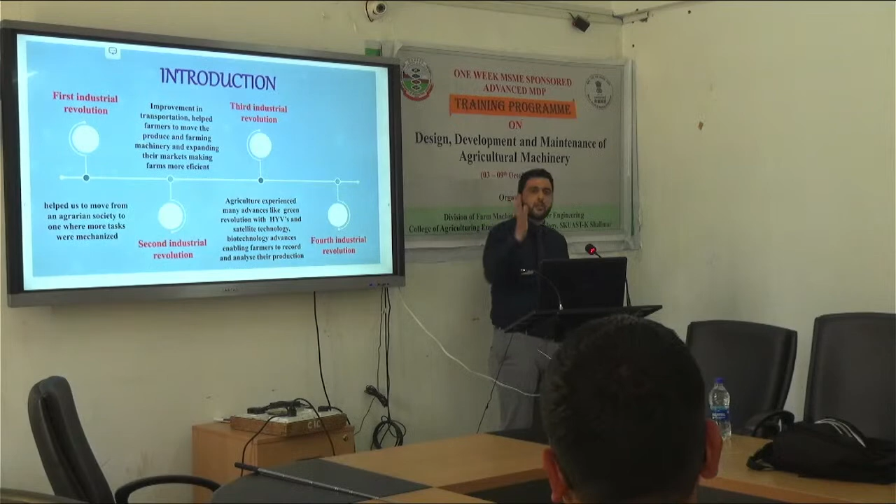Then, in the third industrial revolution, what was happening parallel in agriculture? Green revolution, high yielding varieties, mechanization, nutrients - all of this was happening in the third revolution.

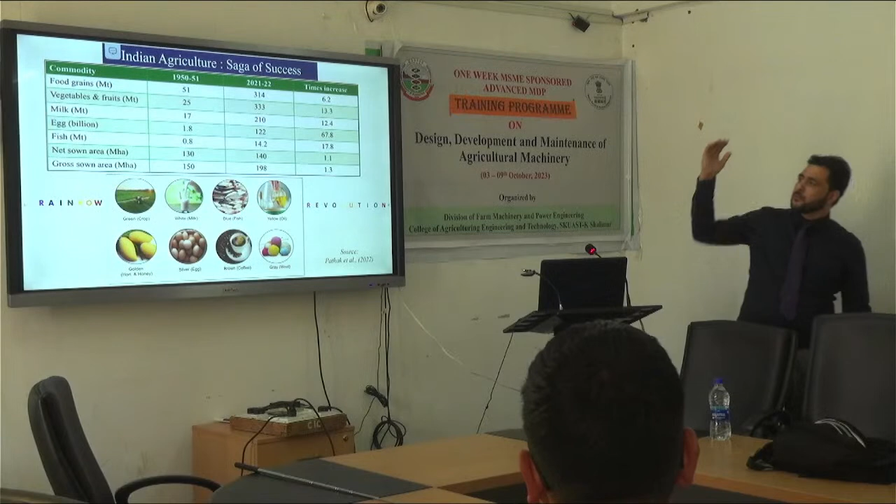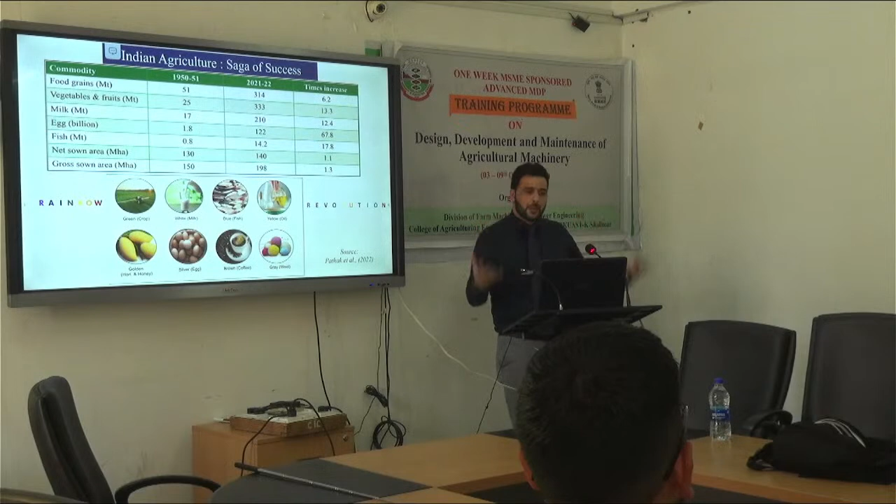What is happening in net sown area? Just 1.1 times increase. What is happening in gross sown area? 1.3 times increase. This means we have been able to sustain the growth in agriculture through increase in productivity, per unit how much you are getting, that we have been able to increase. Now India is thinking to be developed by 2047.

So currently you have extra food, you are food sufficient, but what will happen in 2047? The population will increase. The target is to reduce the population below poverty line, BPL. Although this is not the right term, BPL, it is actually bottom of the pyramid, not below poverty.

Rural population dynamics will change, people will be migrating to cities, so urban areas will have more population. There will be a drastic reduction in agricultural force. This is one point, keep in mind. I will remind you continuously - drastic reduction in agricultural force.

We have to increase the income to be developed, it should be parallel to the US. But if you see the bottom two again here, the resources - your water and your land availability - they are going to reduce drastically.

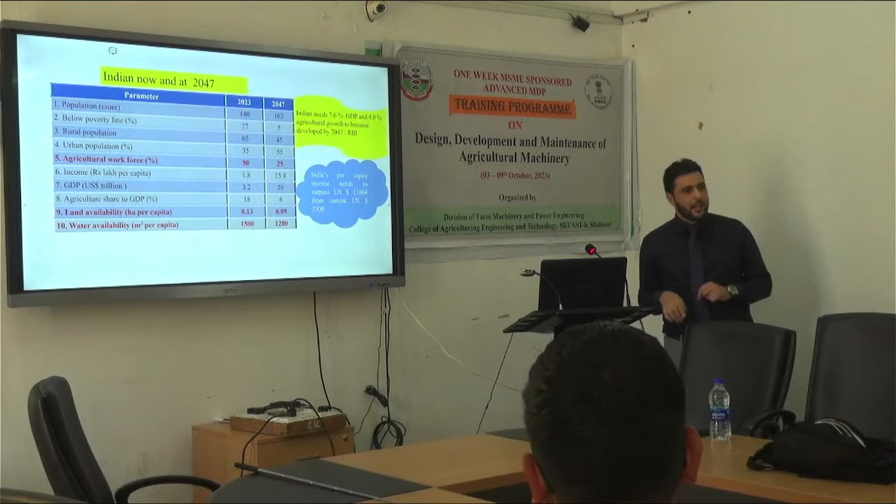So how does agriculture have to progress to sustain the current condition in 2047? We should be food sufficient, food secure, and we should be exporting food. So based upon this population, the National Institute of Agricultural Economics says you need this much food, this much fruit, this much vegetables and nutrients.

And there is a target to increase mechanization by how much percent? It has to reach 75%. For farm machinery people, this question is sometimes asked in JRF, SRF exams - what is the level of mechanization in agriculture in India? It's currently 45-47%. Government has set an ambitious target to increase it to 75%.

To reduce post-harvest losses to 10%, it's currently 15%. Water use efficiency is currently 40%, it has to go to 60%.

Now see, these are the challenges I'm telling you - to increase mechanization, to increase water use efficiency, to increase nutrient use efficiency. Nitrogen use efficiency is currently 35%, where does it need to go? It has to go to 50%. And agriculture export accordingly. If we are able to do these bold-letter items, then others can be done.

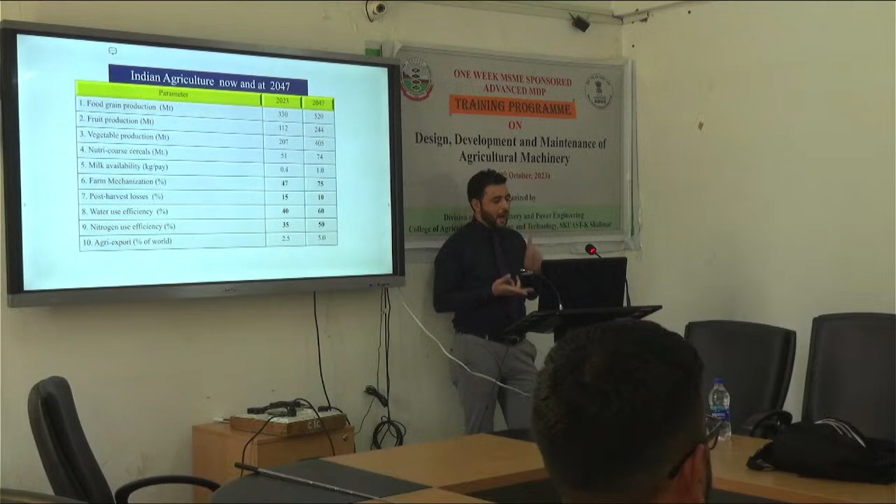So if you see this, one is farm mechanization. Other is to reduce post-harvest losses. How can you reduce post-harvest losses? By having proper storage structures, on-farm storage, cold storage - everything should be there. Then you have water use efficiency.

How are you going to achieve water use efficiency? You are going to use advanced irrigation - drip irrigation, sprinkler irrigation. That way you are going to save water, using advanced methods.

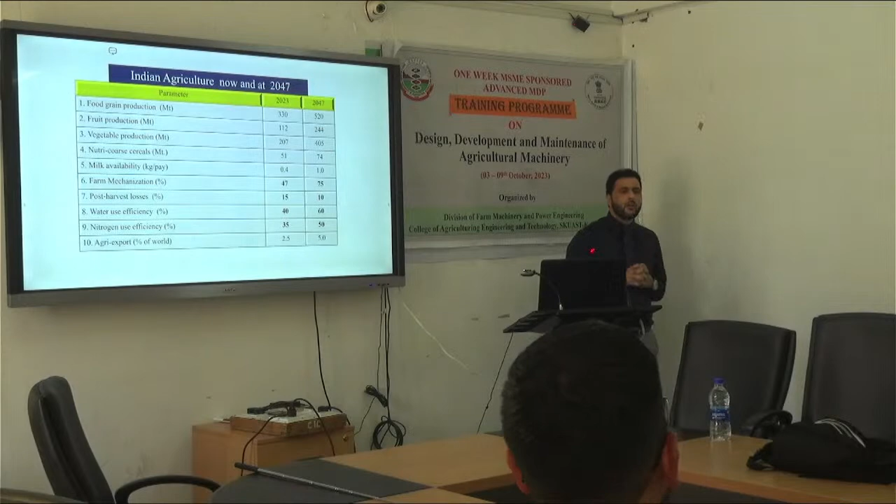Then next is nitrogen use efficiency. How are you going to increase nitrogen use efficiency? You are going to use better fertilizers, coated fertilizers like neem coated urea. You are going to use variable rate technology, variable rate fertilizer applicators. That way you are going to fix it. So this is the target.

So what you can get from this is that these are all engineering aspects. It's all about engineering - that is why the future of agriculture is engineering agriculture. Engineers of the 21st century must know biology, and biologists of the 21st century must know engineering. So whether you are from horticulture or engineering, you have to know each other's discipline. Agriculture engineers cannot contribute if they don't know biology and agriculture. Same way, horticulture people cannot progress if they don't adopt engineering. It's intermingled, it's like that.

That's the future. So when the future is agriculture engineering, or we can say engineering agriculture, this is what you have learned till now - the green revolution helped India attain self-sufficiency. That's the number one point which you learn.

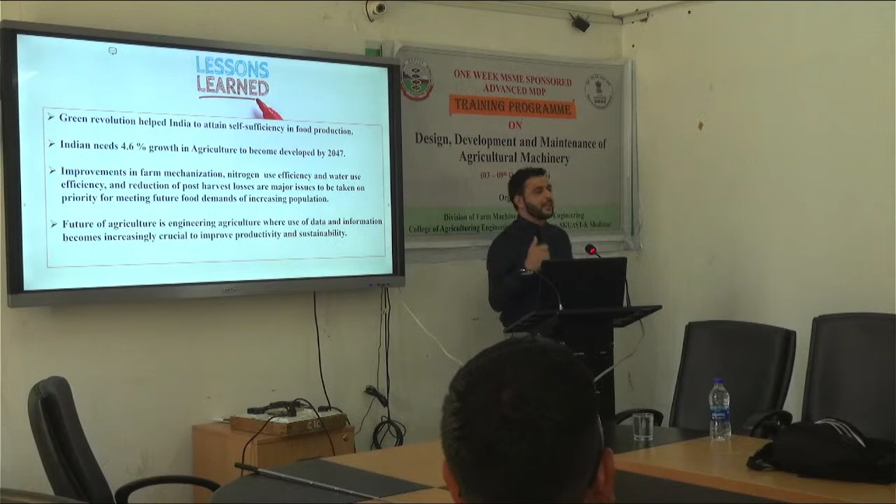India needs 4.6% growth in agriculture to become developed by 2047. The third point is improvement in farm mechanization, nitrogen use efficiency, and water use efficiency - these are required to meet future demands. The last point is that the future of agriculture is engineering agriculture, and when that's the case, we should know engineering design.

I am going to take you back to the point I started with, why I need to be present in this lecture. So when we go for the engineering design process, what is the first step? What is the first point? How do we start engineering? What is the need? What is our need?

Let us suppose, every research project starts from need. If there is no need, then why waste the time?

For example, you have the crop apple. What is the current engineering need in apple cultivation? Tell me. Cold storage, spray - many needs may be there. So we will first analyze the need. What is the need? What is happening? What is required? So that is the first step - define the need. In any process, first define the need.

What will come next? Tell me. Use your brain - this is just interaction, not a knowledge check. We have come here to learn. You learn from me, I will learn from you. This is how the capacity building program goes on.

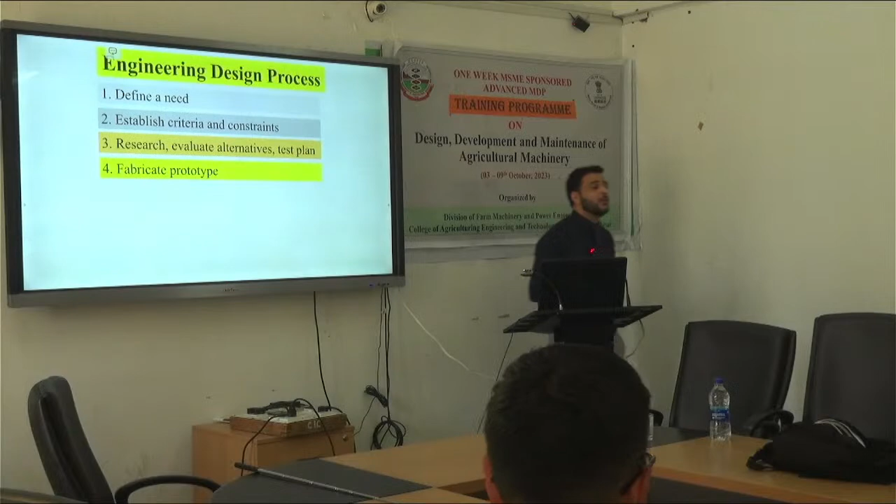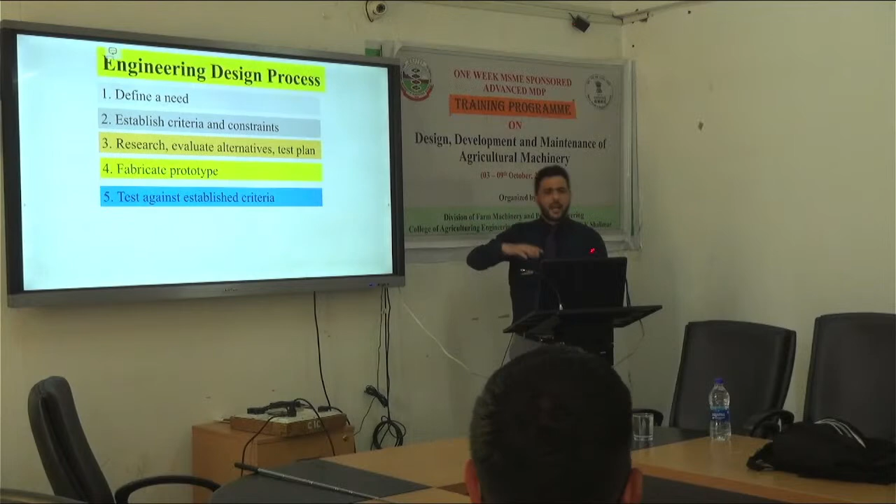There you get stuck - how to fabricate, what materials to use, what I have to do - all these questions arise. So once you fabricate, you test it based on the constraints you have set, like that it should cover this much area in this much time. You test it accordingly and try to refine it.

Then you do its failure analysis. You had set some constraints, like that you would build it tractor power operated, but the power range should be up to 35 horsepower. But once you made it, it isn't even being operated by 40 horsepower.

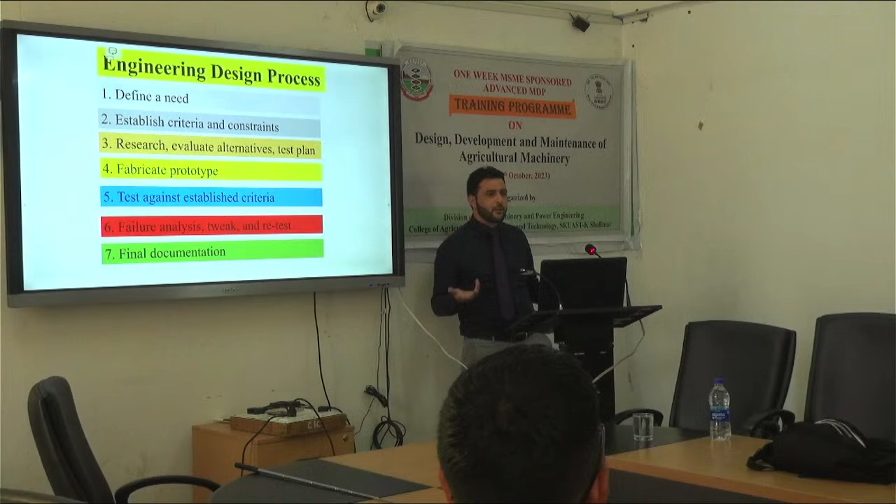So you try to analyze where the problem is, which you want to rectify. You do the failure analysis, and finally you do your documentation. Okay, I have developed this technology. So this whole thing is about engineering design process, starting from solving the problem of agriculture, where the future is engineering. When you are going into engineering, ultimately you have to fabricate, and that is why you need to know the modern practices for fabrication.

You got the point? Yes. So the point is clear, that when we go for the modern trends in farm machinery, the first point is sustainable material. First the material comes - which material you will use. Second will come how you are going to design - you may use design software. I will discuss these points.

If any time you feel bored, you have the right to go out of the class. It's not that I will keep you bound, okay. This is the interaction - if somebody is feeling bored, they can go roam around and come back. Okay, this is it, and you can stop me anytime. If you have any confusion, you can stop me. This is considered capacity building. Okay, that's important - it's not lecture, it's not training.

Okay, what is the difference between capacity building and training? Actually, for humans, the term is capacity building - so that you build their capacity, they can apply that anywhere, here and there, not in one direction only. Who normally trains? Circus people - they train them that you have to do it like this, this way, nothing right or left. But we try to have the capacity building for you, so that when you go in the actual situation, you use your brain, you use your capacity building, what you have developed, and try to solve the problem.

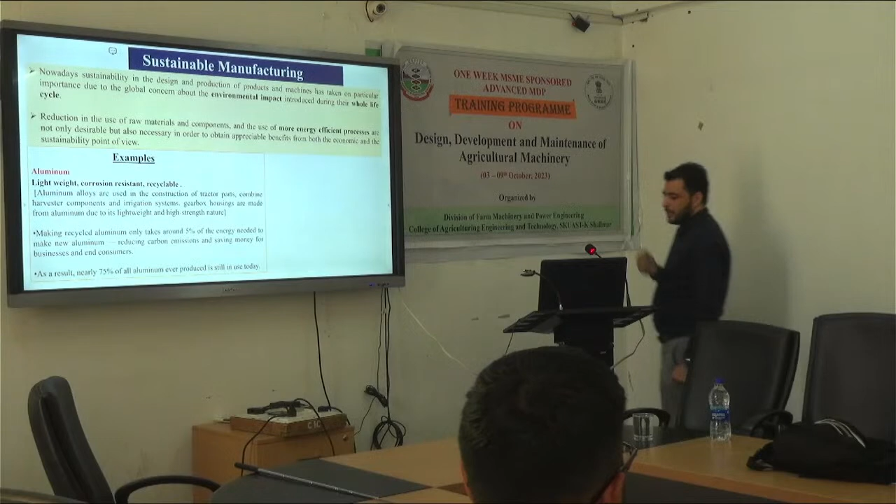So when we talk of sustainability regarding materials, that's why these days sustainability is a big concept. Whenever there is sustainability, understand that it is related to environment. Earlier we were thinking only of economics - we need money, everyone just wants money. Today it is not so. You are earning an additional 100 rupees here, but in the process you are damaging the environment by 200 rupees worth - so that is not a good option.

That's not a viable option, that is why sustainability matters, and one of the materials under focus for sustainability is aluminium. Okay, why? I have written the reason - the reason is it is recycled. Whatever aluminium you are using, it's being recycled, because it doesn't rust, it doesn't get damaged. That's why whatever aluminium you see in the world right now, 75% of it is what was already produced - only 25% is new that comes and goes.

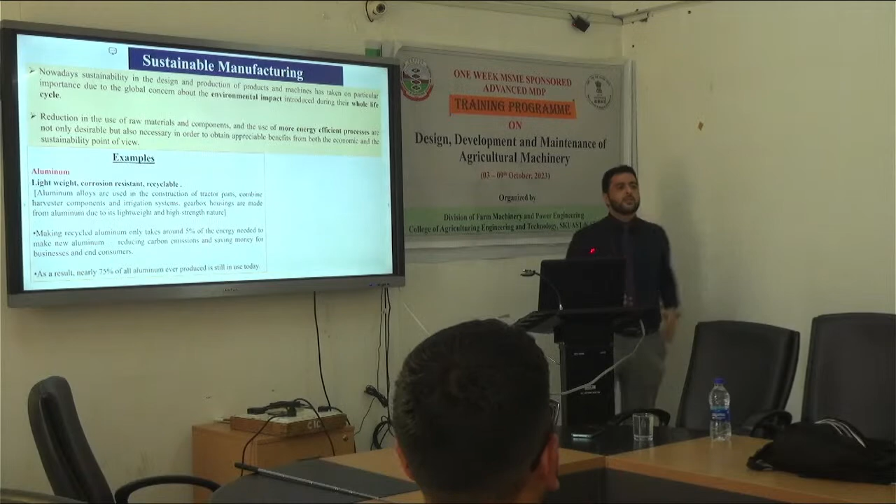Okay, because it is recyclable, it is lightweight. That is why, if you see the future trend in tractors, the roof will be built lightweight - it will be heading towards aluminium. That's what is written here. If it is not visible to you, I am sorry - that is what is written here, that the agricultural tractor is going to be compact, lightweight. So it is to be, for example, with electric tractors.

So you will be using a material that is lightweight like aluminum. It is a sustainable material in the sense that it can be recycled. It is sustainable in the sense that throughout its life cycle, during recycling, only 5% of the energy is used compared to what is used in making it new. So why should we not go for it?

Second point is bioplastics. Bioplastics - you see the plastics you have that are non-renewable. Bioplastics means any plastic that has more than 20% renewable portion. You make it only from agriculture - whether you have sugarcane or corn, you develop bioplastics from agriculture produce. So that is how you add value - when we say bioplastics, it means more than 20% is the renewable component in that.

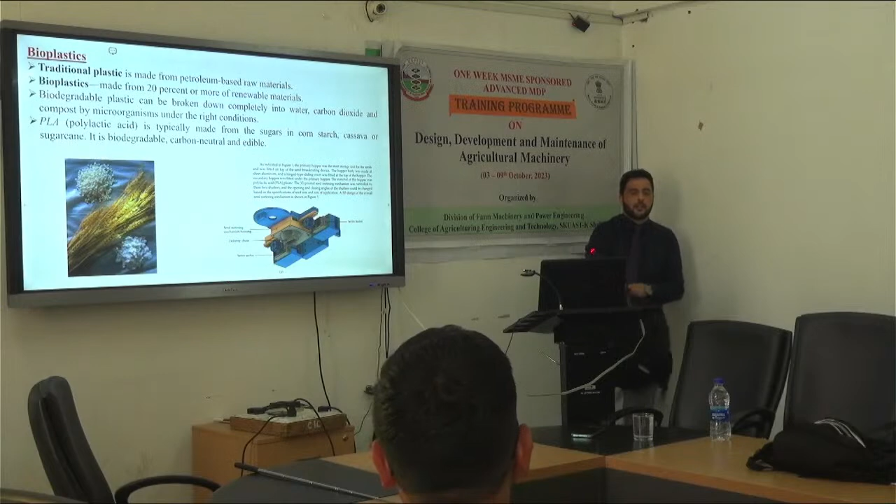And you will see in machinery, many components are made of bioplastics. Like one of the bioplastics is PLA, that is polylactic acid. I think I had a component here with me, let me check.

Yes, you can check this component. This is our bioplastics, this is our PLA. Understand this, I will explain later on how we produce it. This is bioplastics - see, lightweight, sturdy. This is being produced in our lab.

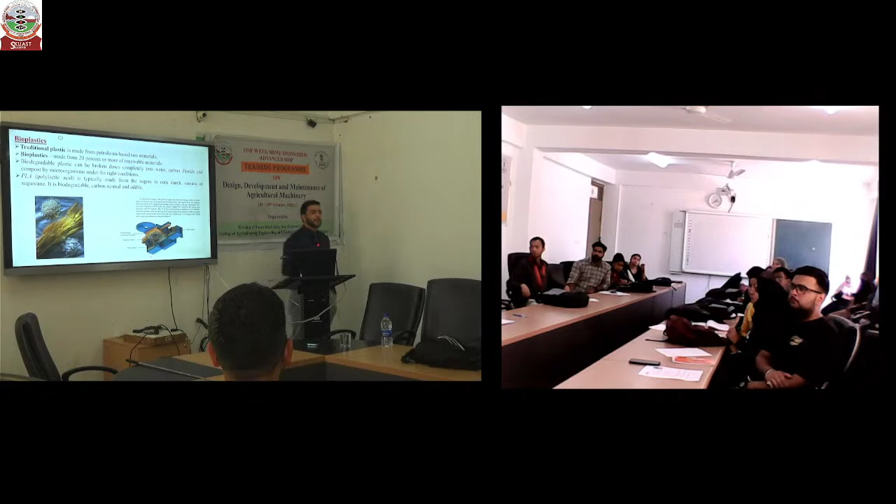So first material is aluminum, second is bioplastics. Any other material that comes to your mind? Something sustainable, environmentally friendly that we should use? Anything comes to mind? Biofuel - yes, but no, I am talking about material, not fuel. Biofuel is not a material, you may use it as fuel in the engine, in tractor engine, but I am talking about material.

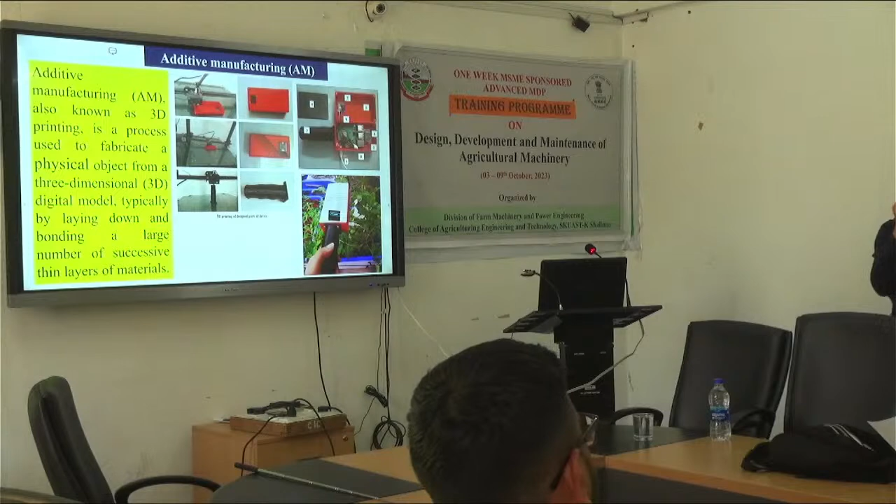ओके, तो सेम वे इसके लिए हाउसिंग बनाने के लिए, ये जो आउटर कवर बनाने के लिए, फिट बिठाने के लिए, we did it of our own, print किया, फिक्स किया, हैंड डिवाइस बनाया। You can see the steps, उसका हैंडल बनाया, सब किया।

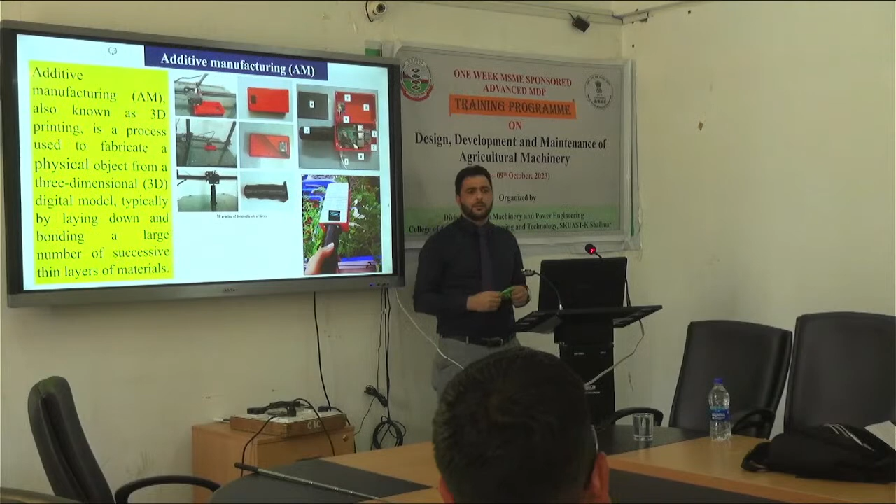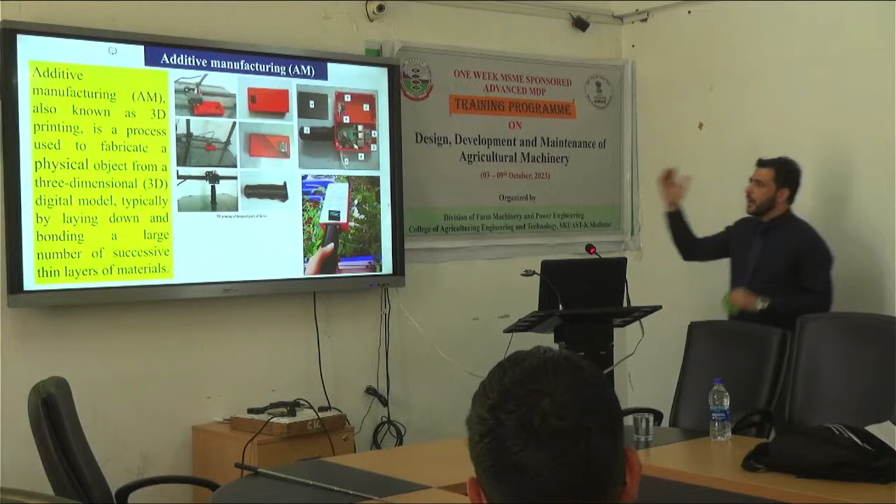अगर आप यही वर्कशॉप में बनाओगे, इसके लिए जो यहाँ प्रिसीजन है, जो सीड के लिए है, ये पॉसिबल नहीं है। So we used the additive manufacturing, that is use of a 3D printer। 3D printer क्या करता है, जो मैंने आपको बताया था, PLA पॉलीलैक्टिक एसिड, ये जो वायर है, you can see this is 3D printer।

आप जो नीचे देख रहे हो ना ये वायर, this is PLA वायर, जो मैं बायोप्लास्टिक्स की बात कर रहा, let us suppose I have to make this। So what will happen, it will create its base on the platform। यहाँ पे घूम के इसका बेस बनाएगा। जब बेस बनाएगा, अब ऊपर ऊपर उसी हाइट में चलता जाएगा।

So you can get this. You can get many 3D printers ranging from 25,000 to crores, you can get depending upon you.

So the next part, first is the material we use. Second part is design, use of design software as CATIA, ProE. Learn at least one design software, it's your choice. Many are there, CATIA is there, SolidWorks is there, ProE is there. You can learn, and I am conveying this not to engineers, to all. I told you to be relevant in future, you have to learn, otherwise you will not be relevant in the future.

Okay, next is automated manufacturing. So in automated manufacturing, what we are doing is automatic welding, many automated operations.

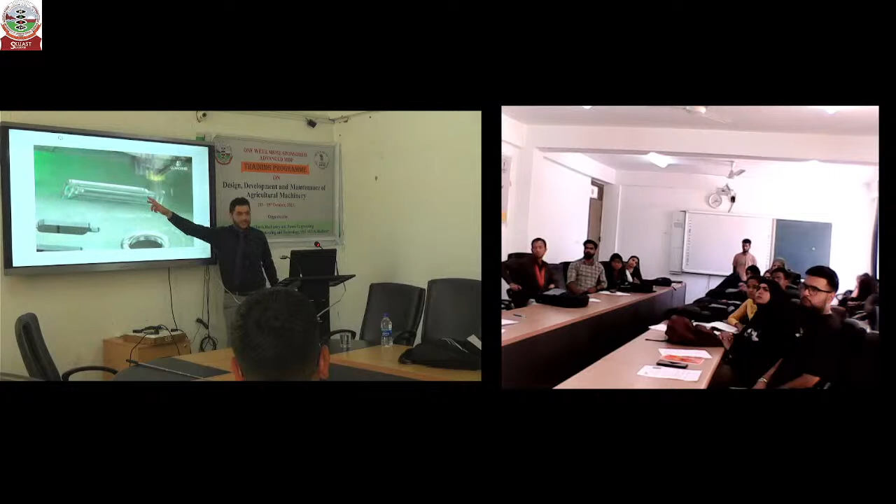Such precise decisions. Through numeric control, it is taking this decision of where to go from here to there, how much to do, that's exactly what numeric control decides, where to go. That's what decision it is taking. What size to make, this is how precisely it is being done.

Okay, I think you understand the best. Later on you can see if you want to see, because I had been given time only up to 11:45, and I had prepared material for the whole day.

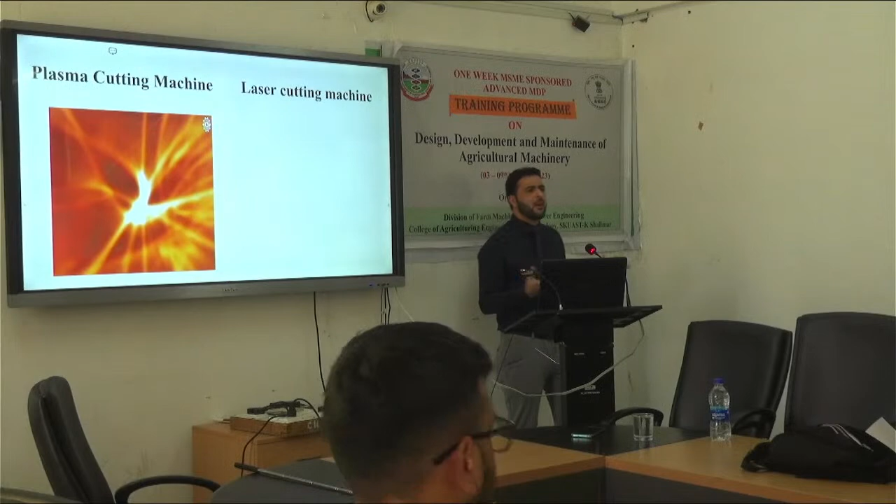You have to do cutting. Two types of cutting are mostly used in advanced manufacturing. One is plasma cutting, other is laser cutting. In plasma cutting, what happens is you generate a plasma beam and cut with it. In laser cutting, you use laser beam. You use laser beam and go for the cutting.

This is plasma cutting, generating that plasma and cutting it. But it's only for cutting purpose, you cannot do other operations, only cut. What shape do you need to cut in?

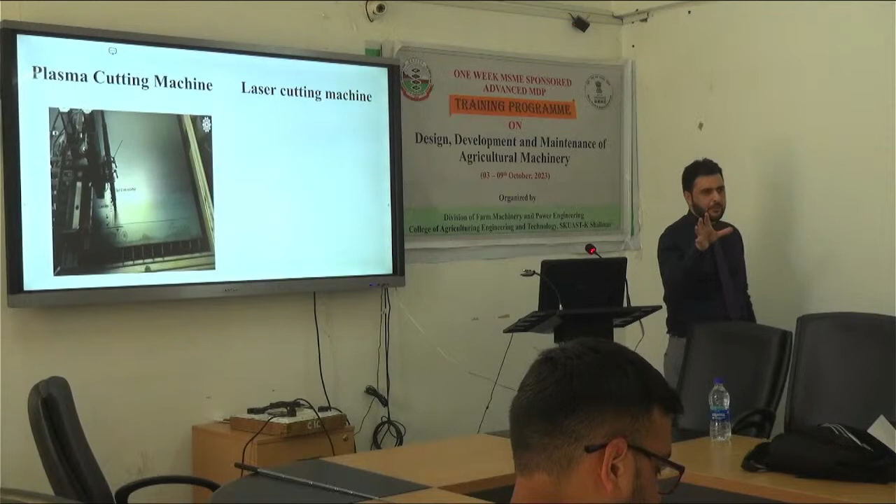Let us suppose you need a covering for a tractor frame. You need to cut that. You can cut hundreds of pieces in sheet metal and take it. You can have the code for this. And the other is laser cutting, same like this, only thing is the beam used is laser beam.

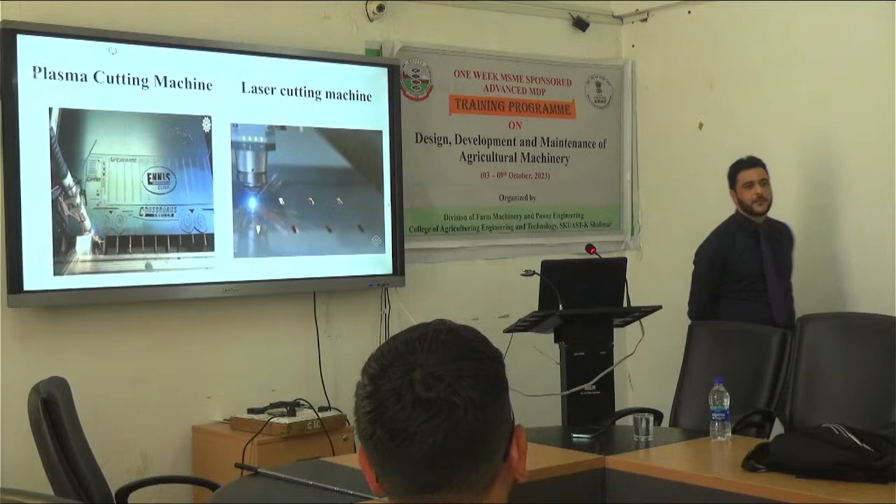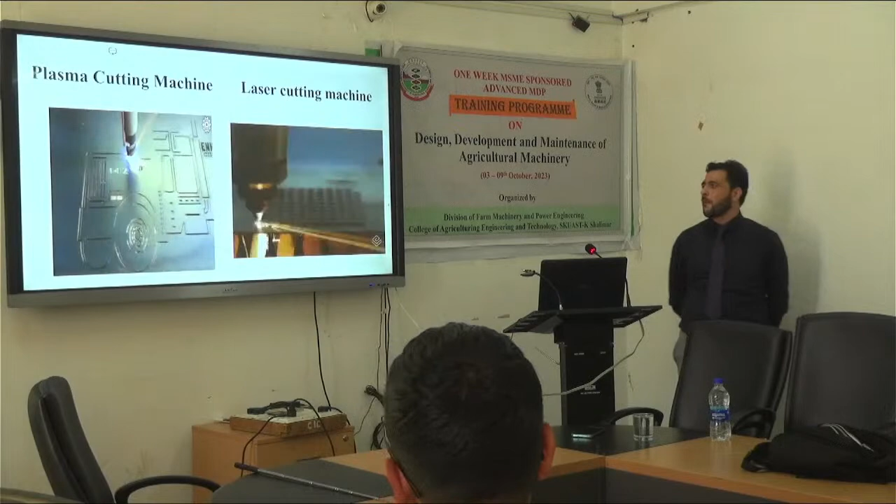You can do many operations like this.

Are you getting the point what I want to convey? It's important that you should know what is available. Only then will you be able to pick. Otherwise you will not be able to. You'll keep working in the workshop.

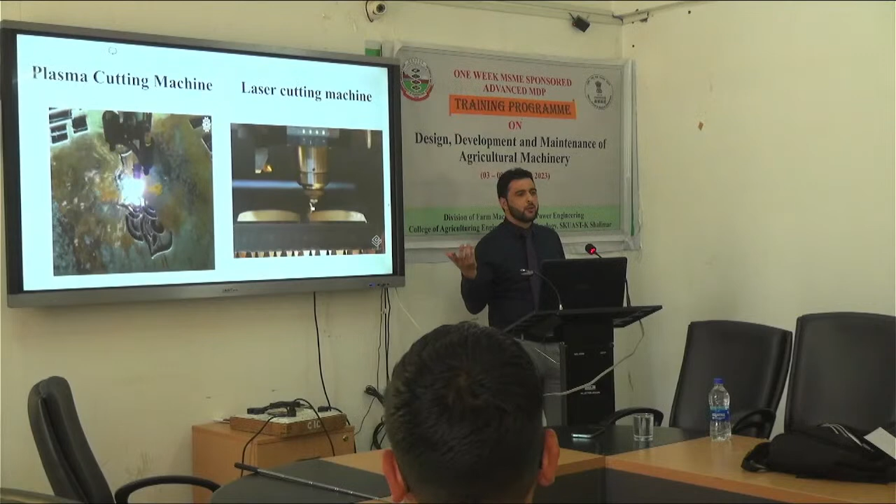You know you have the M.Tech research project or MSc research project for 1 year. You do the course for 1 year, and if you start doing it, maybe it won't finish in 8 months. You go to industry, give 10,000 rupees, say I need this, in 1 day they will give it to you. That's all, you are saving time. This is what I wanted to convey about the advances in manufacturing.

So what is the lesson learned in this part? I gave you 2 parts till now. Can anybody repeat the lesson learned in the first part? Tell me, I had told something earlier related to agriculture.

You need the growth, mechanization is there. These are the challenges to become developed by 2047. You need 4.6% growth in agriculture, along with nitrogen use efficiency, water use efficiency, and mechanization. How do we have to increase these?

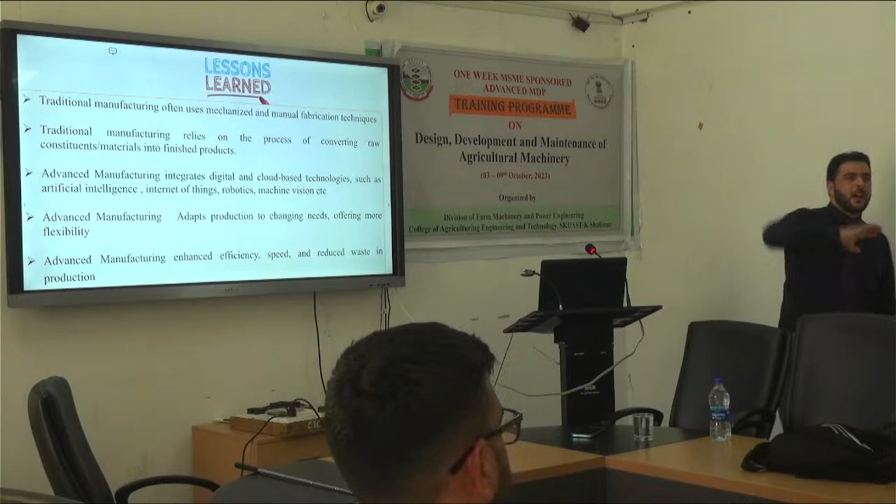That was the first part, and I gave you the idea. Since the future will be engineering, you need to know engineering. In engineering, we follow the design process, and in the design process, fabrication is very important. If you are not able to fabricate anything, you will not be able to call yourself an engineer, or you are not providing any engineering solution.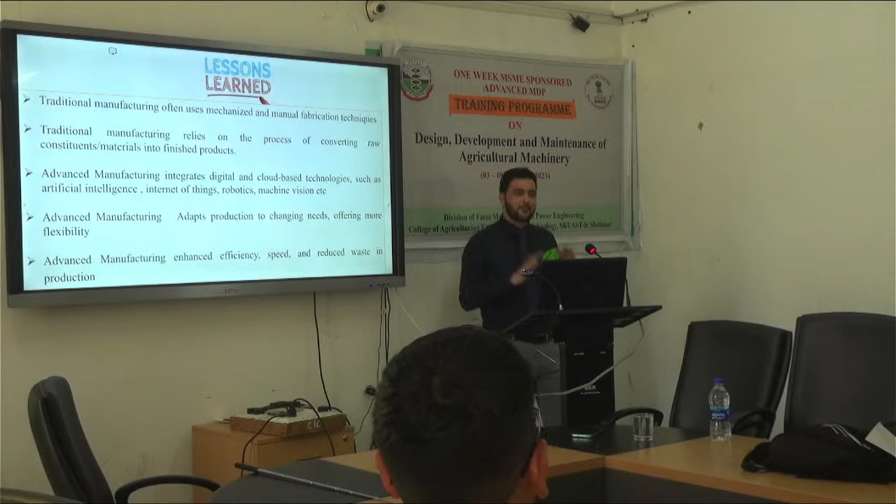This is what is available with you, and you should be knowing this too. Agriculture engineers who are B.Tech or M.Tech might have done all this - arc welding, TIG welding, blacksmithy, fitting, bending, drilling operation. These are the general operations.

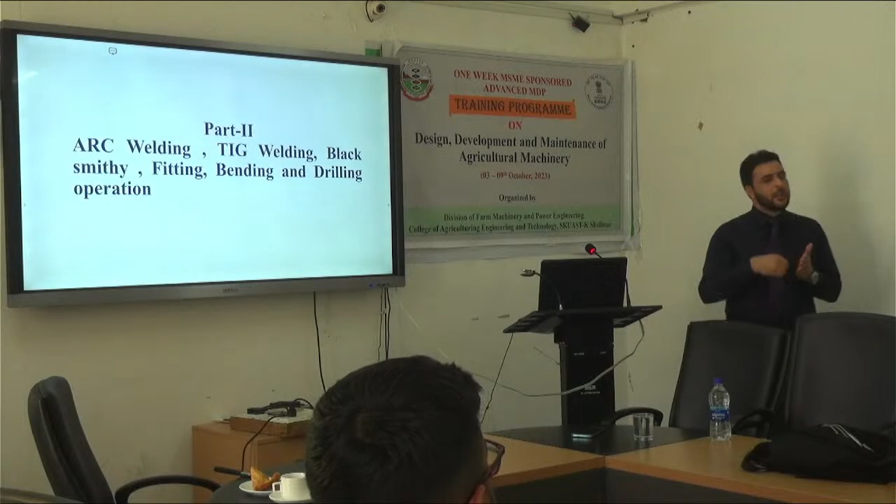So the first point is, whenever you go for the welding, it is not necessary to touch. That is the problem - when we go for the welding, हम सीधे उधर ही टच कर देते हैं. यही करते हैं ना? हमको गैप थोड़ी सी देनी है. We have to allow the arc to jump. जब हमने वही नहीं दिया, हीट उतनी प्रोड्यूस नहीं हो रही, वो मेल्ट ही नहीं हो रहा है, और वो चिपक रहा है. That's what is happening actually.

So the basic principle is, you are going to join the two metals in this. You are going to melt them. You need heat generation, and for heat generation you want the electric arc to jump. For that jump, you need electrodes, क्योंकि करंट को फ्लो करना है, so you need positive electrode, negative electrode.

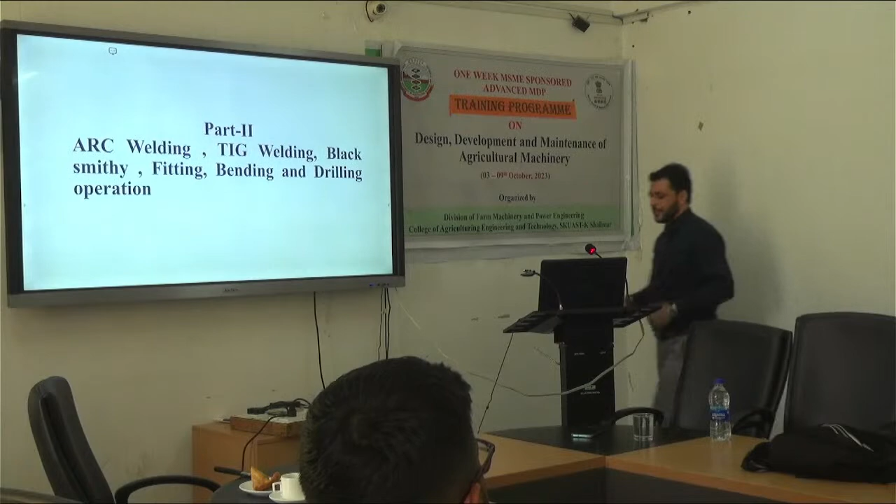इसीलिए क्या कर देते हैं आप? I am going to show you. I hope that this is the basic principle - you need the electric arc formation.

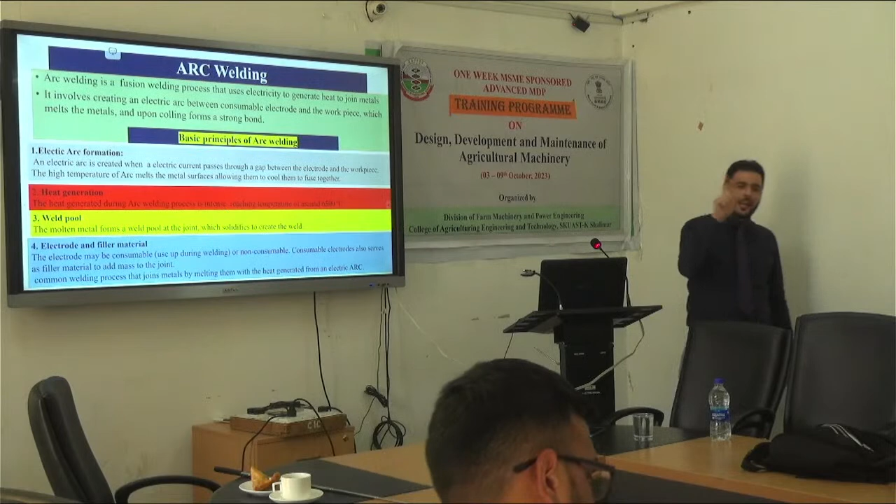Electrode means हमने जो job है हमारा - let's suppose I want to do welding, this is the iron piece. मैं इसको negative connection दूंगा. Now I need to give positive connection, only then current will flow. इसीलिए मैं इसको clamp एक लगा देता हूँ, that is negative. उसके बाद में electrode through positive देता हूँ. Remember, that is the electrode that is providing the positive side.

That can be consumable, that can be non-consumable. Its first purpose is to make the flow of electricity, current through it, so that may be consumable, that may not be consumable. Then we use some filler material. That is why when this electrode is consumable, it acts as filler material. जिन दो को आपने join किया ना, उसमें और एक चीज मिला दिया ताकि अगर कहीं gap हो, वो बंद हो जाए. But there is one more problem.

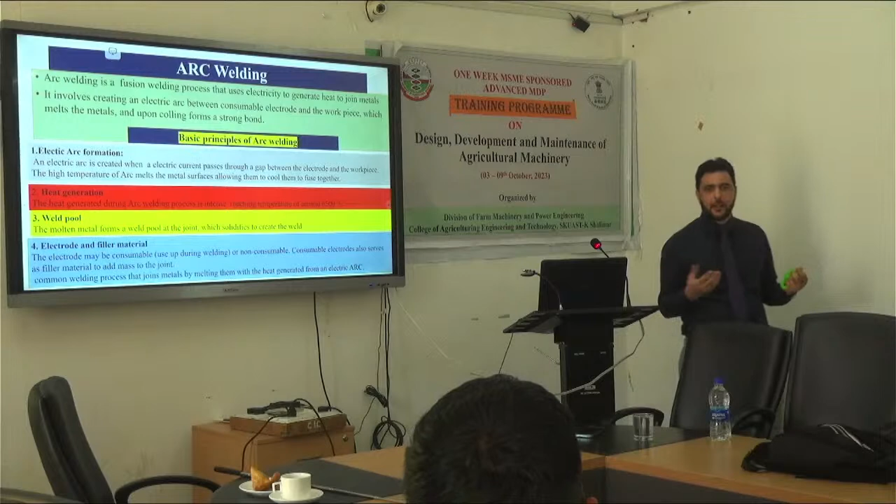When we go for the welding, हमने दो को join किया, melt किया, there is atmospheric oxygen, pollution may be there, कहीं पानी है कुछ है, जो हम weld बना रहे हैं, it may get contaminated. और later on stage में आप देखेंगे, वो crack हो गया, weld किया था crack हो गया. So you need, जब आप welding कर रहे हैं, you need to shield that. आपको उसको cover करना है. So for that you use shielding material.

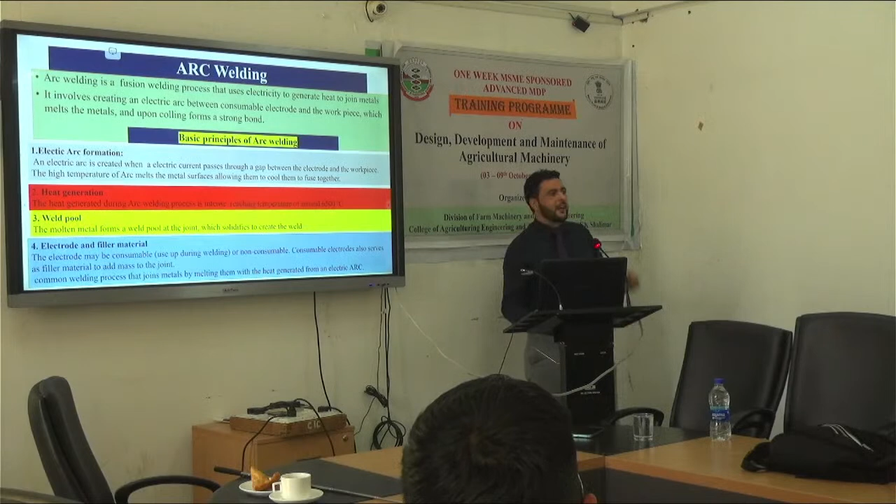तो जो आपका पहला है arc welding, all varies depends upon the shield. I will explain you how. This is what I was governing as the principle - this is the principle you are doing.

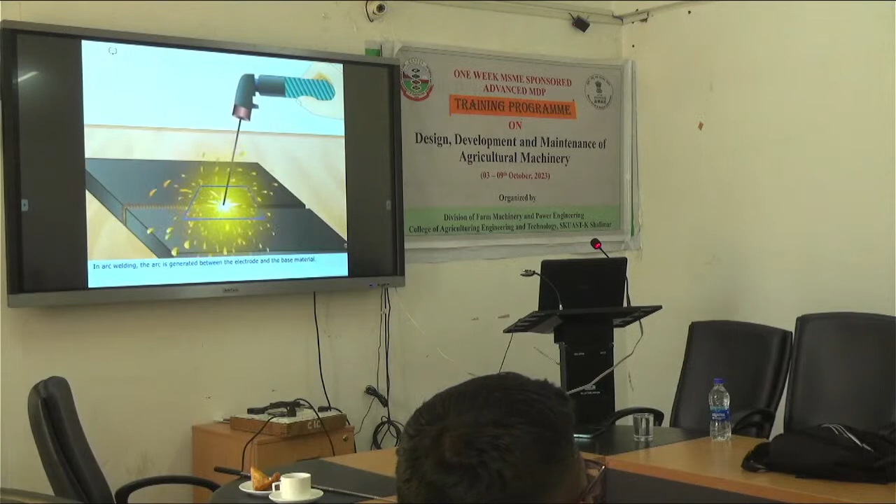Okay, see this? Can we off the light? There's an issue. See this one.

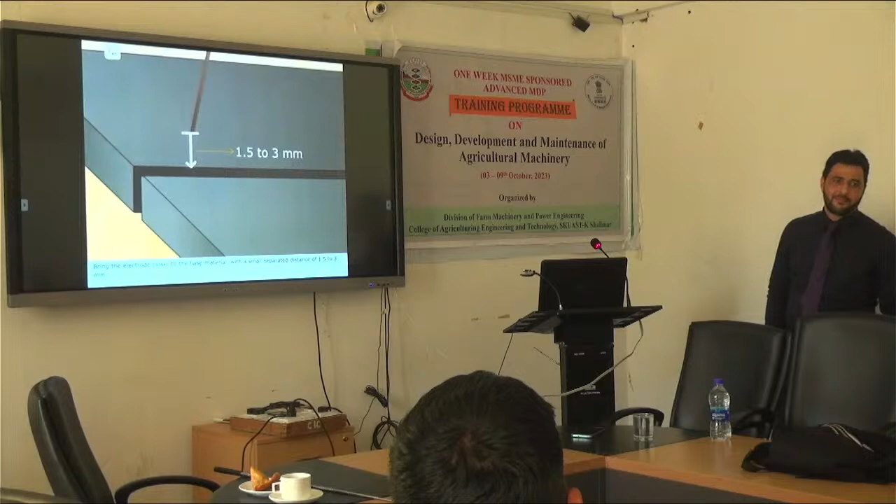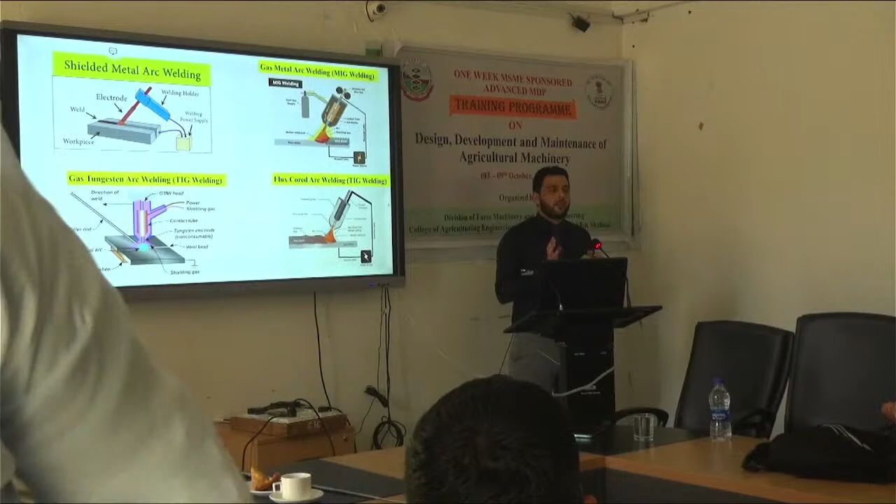Flux - if you go to the second one, there is not much difference. What is the difference? Here, the shield is produced through inert gas. We make the inert gas reach right where welding is happening, like argon, helium, that way - any gas we use to reach there, so that the melt point stays covered for a while until it cools down, until it takes a proper joint. So that is the difference between the second and the first.

So what is the difference between shielded metal arc welding and gas metal arc welding? It's only what sort of shield you are using. In both, the electrode is consumable - it gets consumed, it finishes.

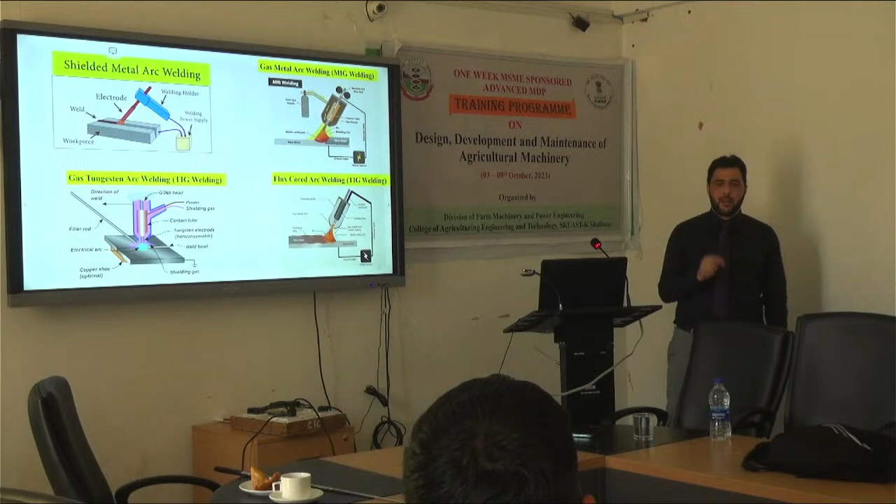If you go to the third one, that is TIG welding. So what's happening here is the electrode is non-consumable. Understand this point - it's only providing you the connection for the current, but it is not consumed. That is why if you see, there is some filler rod. If you see the side point, there is a filler rod. In others, the electrode gets consumed, but here the connection, that is the molten state, is filled through this filler rod.

Okay, so here you can have the shielding through gas in this gas tungsten welding. Important thing is the electrode is not consumed here - it remains as it was before you used it. That is why we use tungsten, because like a filament, it stays the same even after a lot of heat. If we needed to consume it, we would not use TIG.

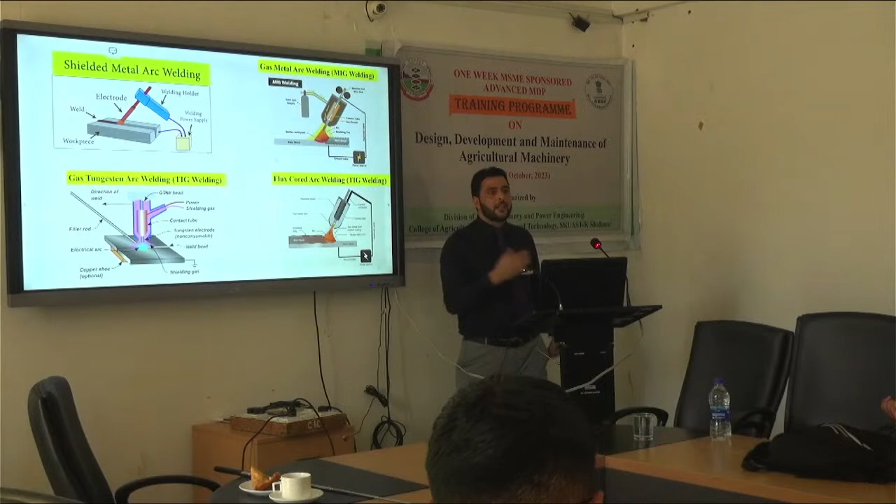Okay, so if you see the fourth one, the flux core arc welding - see it diagonally, this way. This is almost the same as this, consumable. In that one, the shield was outside; here what shields you later, there is flux core inside. The electrode has a wire-like structure at its center that moves forward. You are consuming it, but inside there is flux, so the flux is providing the shield. Is the difference between the four clear?

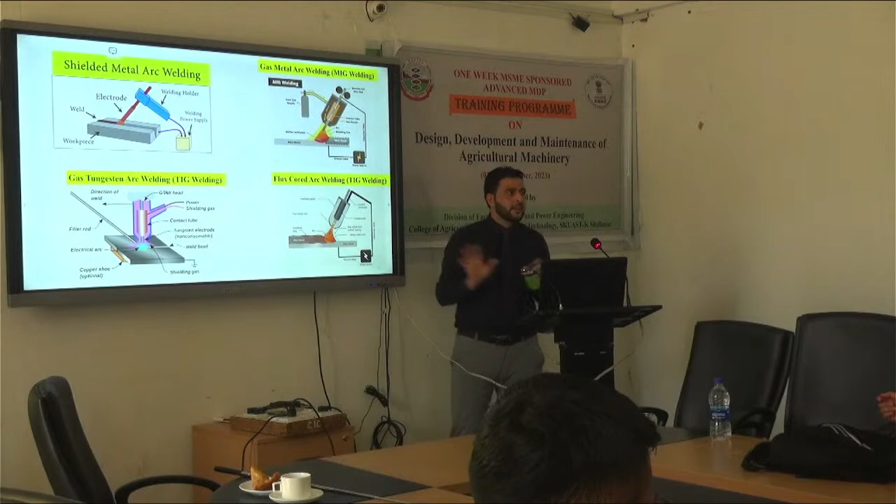In the first one, you have the simple type, which you have seen in this workshop. In the second one, in place of the outside shield, you have gas shielding. So why do you need a shield? To protect the weld from contaminants - otherwise cracks will appear, other issues will occur. Later, this shield material, you lift it off yourself - when you are welding, you then say lift this off, it's coming off on its own. That's the shield. In TIG welding, that's not consumable. Sometimes, for example, you get it in other cases too.

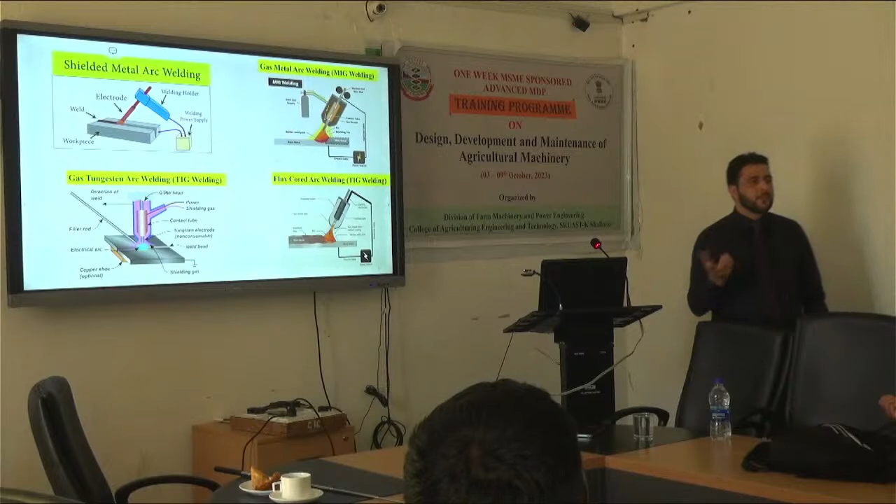In which of the following welding processes is the electrode consumable? There you get confused. Okay, so we use flux here. So this is TIG welding.

This is also known as heliarc, because sometimes we use helium in arc welding, that's why, because we use inert gas. This is non-consumable, what I was conveying to you.

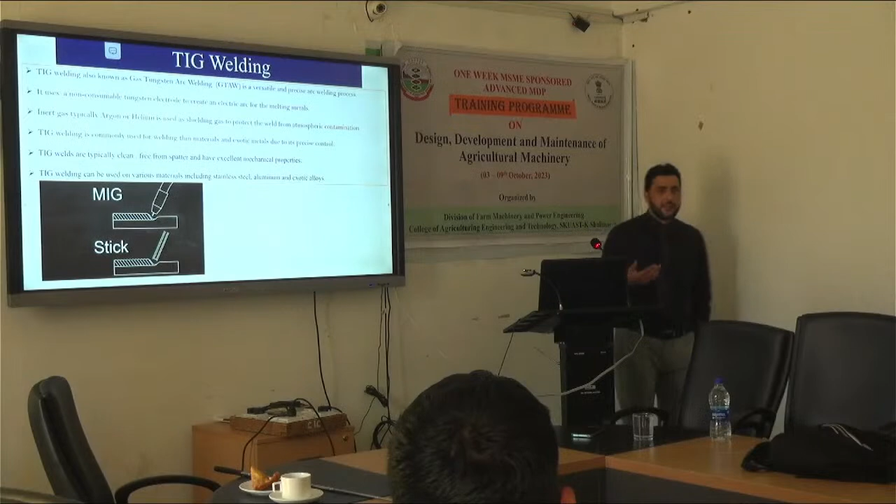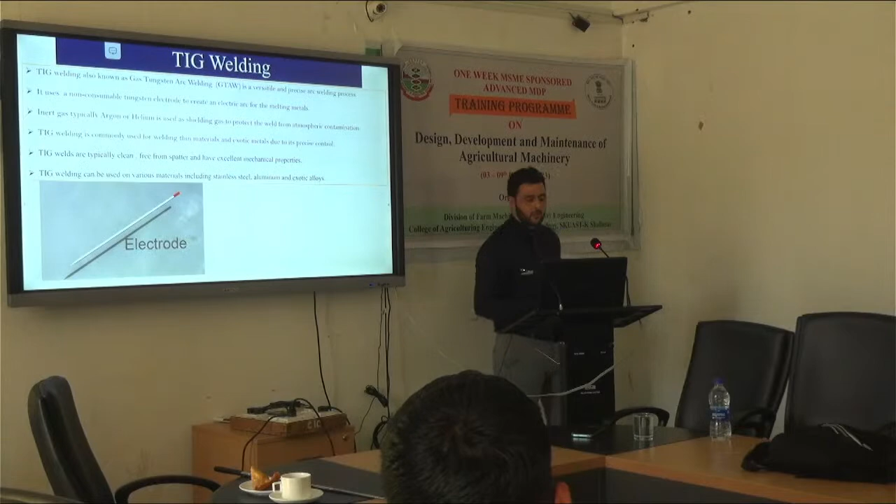In others, like MIG welding, you are having the molten state of that rod. But in case of TIG, it will not be like this. In TIG, you have the electrode, and you can move the electrode up and down through this collet, like we have in a pen, where you can make it go up and down. Same way, you can change its size up and down in this TIG welding, and then you go for it.

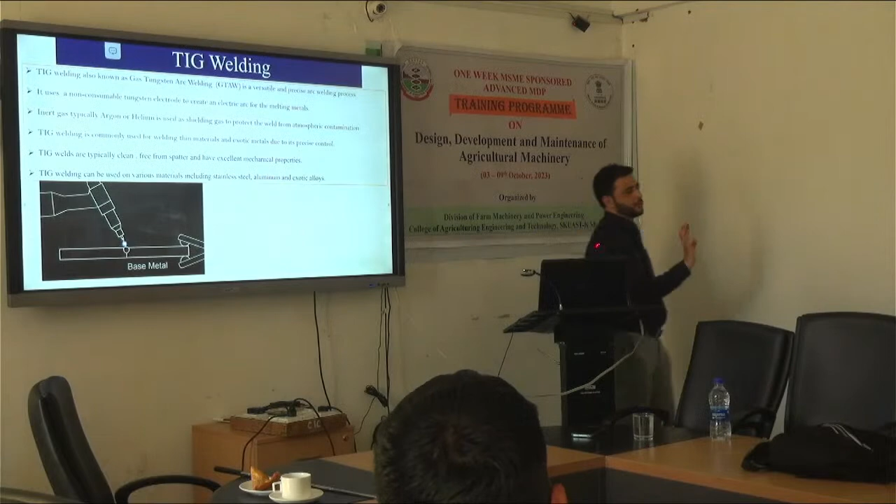See here, the electrode will not be consumed, it will remain as such. This can have DC supply or AC supply. If DC supply, it varies whether you are giving positive to your electrode or positive to the job, because one connection you have to give to the job, otherwise the circuit will not be complete. So that is why it is called DC EN, meaning DC current electrode negative.

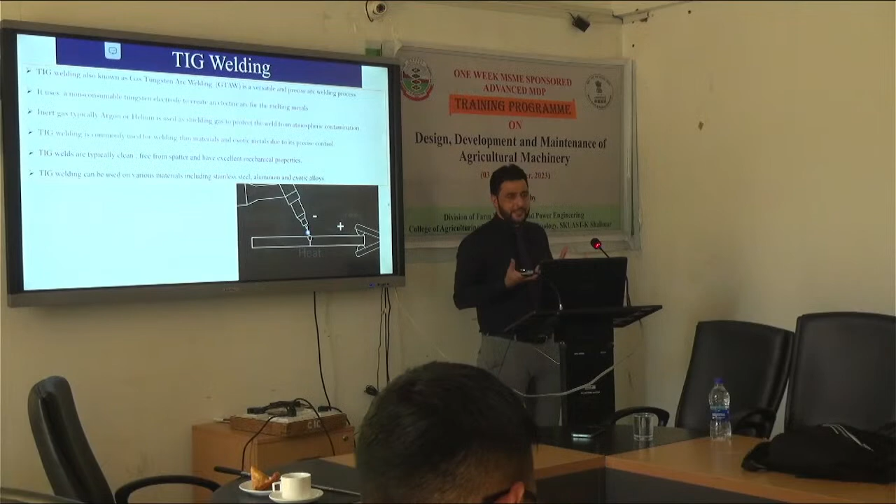If it is negative, it is called straight polarity. There will be more heat generation. In that case, if the thickness of material is too high, we can go for it. Otherwise, we use reverse polarity, that is positive and negative. So this is happening in TIG welding.

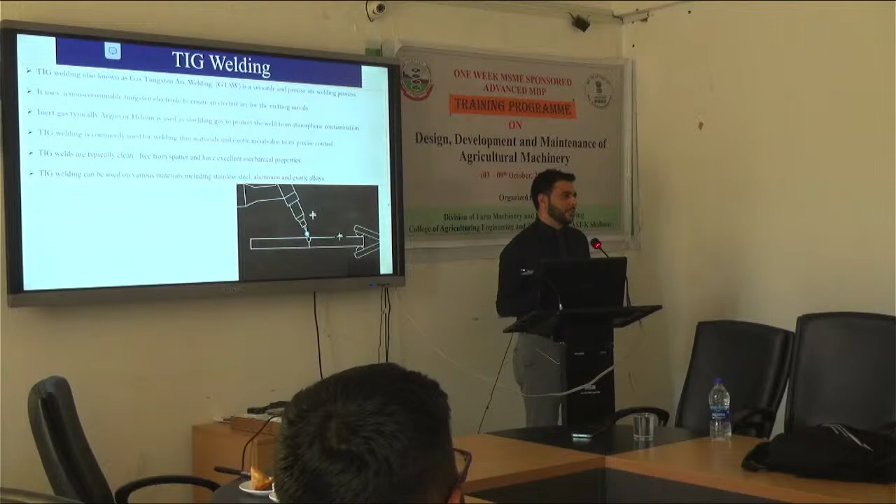That's the basic idea, that the electrode is not consumed, and we also have a shield, and we use filler material sometimes. Those who are expert will not like to use it, but if you are not expert, you have to use filler material, otherwise there will be gaps in between.

Then comes something that actually comes first, but I thought you may not be interested in this part first. You have to understand where you are going. You are going to a place where there is current, where there is heat generation, where it looks like fire, splinters of fire. You have to protect yourself.

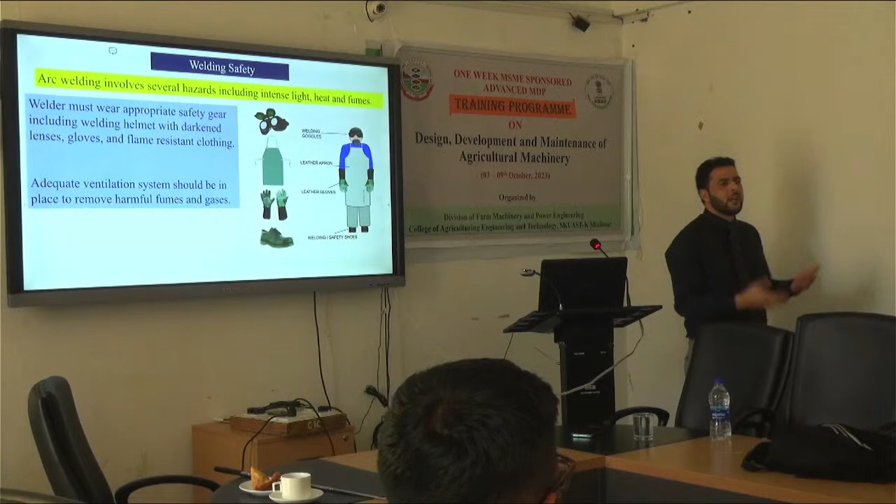That is why this is very important. Whenever you go, there should be proper ventilation, otherwise those fumes will go into your body. This is same as with pesticide: you apply pesticide, it will enter your body, so you should wear a mask. Same way when you go for welding, most importantly, always wear shades for UV protection.

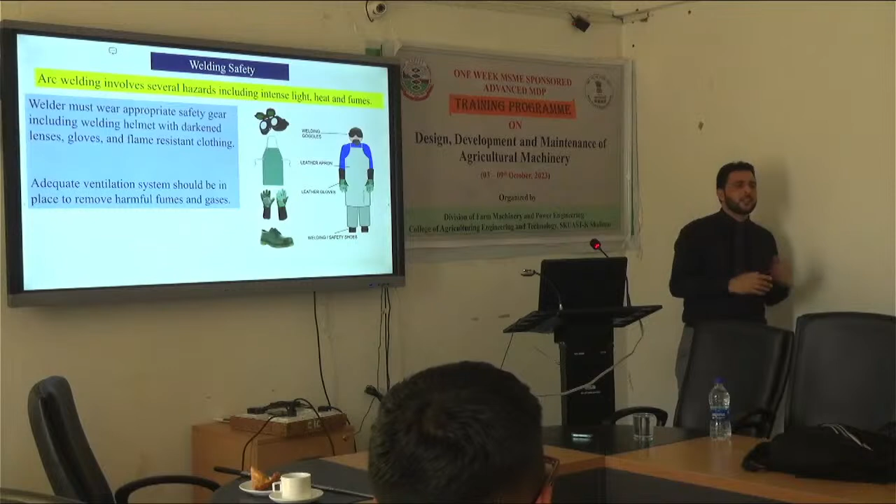It is affecting our eyes.

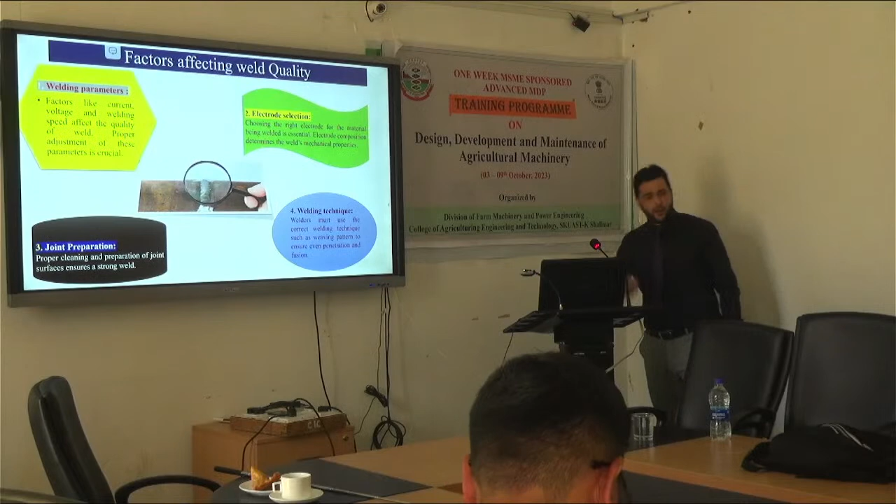Current and voltage should be proper, otherwise you will find that there is no current and nothing is happening. Understand this point about electrodes: they come with a rating, and a number is written on them. Based upon that number, you select the electrode, whether it is suitable, how much current it requires, and what is the operating voltage.

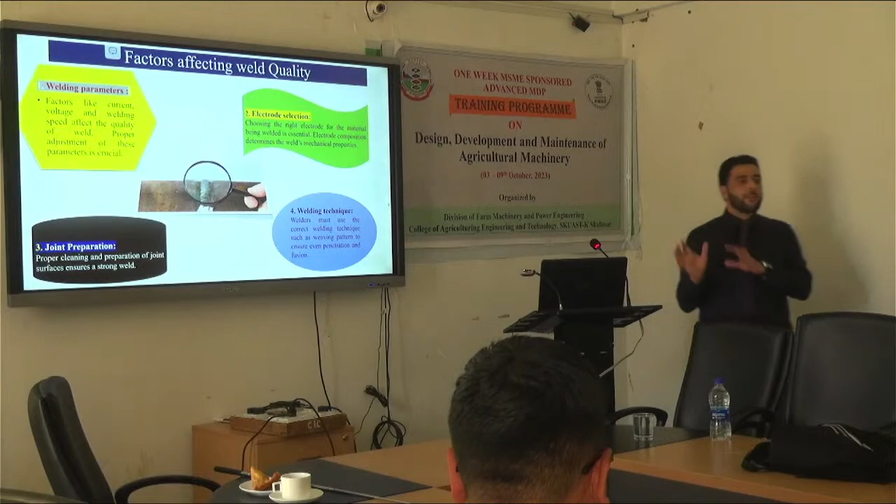Sometimes you can start from the lowest setting based upon hit and trial, then check it on some dummy part, then go to the actual part. This is why you'll often see welders test on scrap pieces first, checking if it's coming right or not, before they go to the actual part.

That affects electrode selection. That's what I was saying about welding technique - welders must use the correct welding technique.

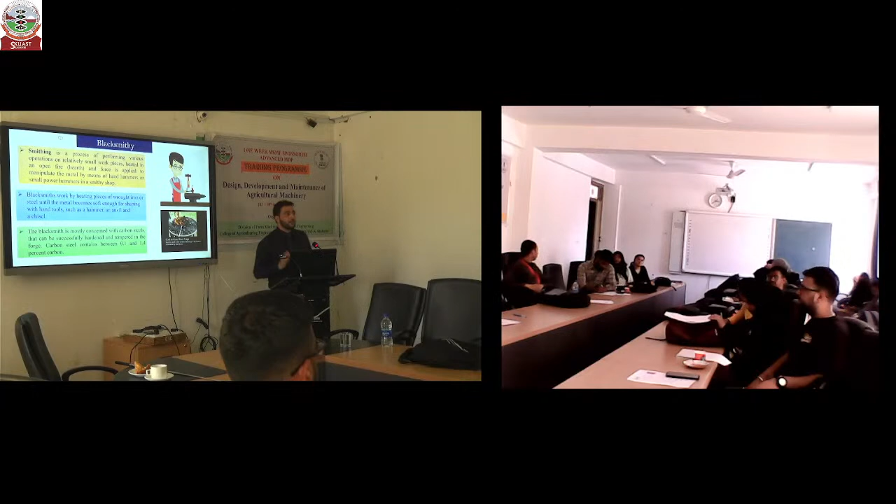Then they do forging - hammering it, working on it - and because of that only we have this small farm mechanization. Even today, small things break down and they can hammer and sharpen them. That small farm mechanization is through local artisans, in which blacksmiths play a major role.

Actually, if you see this term 'blacksmith' - 'smith' comes from skill. This 'smith' is a skill. 'Black' means the color it turns.

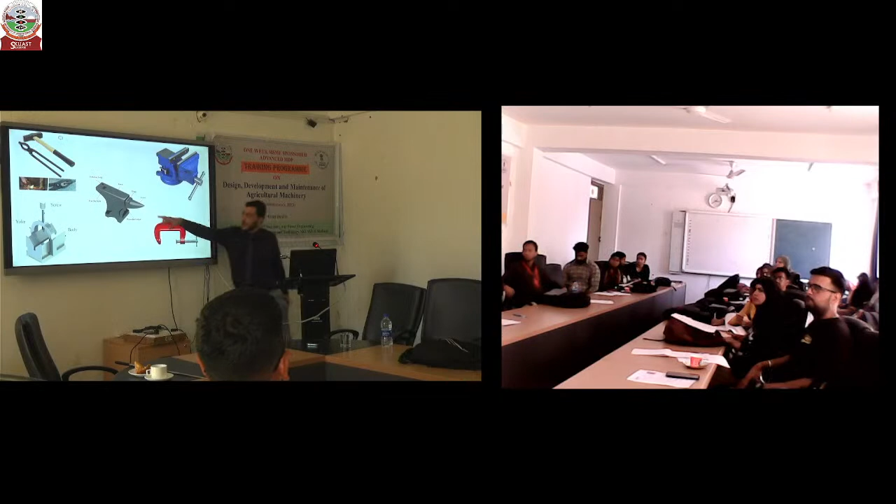इसी तरह इसमें से bend करना हो, they were making it multipurpose just with it. यहाँ पे round bend करना है, that's why I have shown here. If you see, here you can see round करना है. How they are utilizing it?

Same way they have the swage block where you have the different size of holes, shapes. You can hold some pipe, clamp it. All operations using these tools.

ये हमारे पास भी हो तो अच्छी बात है. We can do some work at home, हम घर में कर सकते हैं. Otherwise nobody will consider you engineer, especially the engineers. अगर आपको screwdriver उठाना नहीं आता है, उसको घर में कुछ ठीक करना नहीं आता है, nobody will consider you an engineer. And if you go to the foreign country, you need welding, you have to do. आप अपने प्रोजेक्ट में वेल्डिंग की जरूरत है, you have to learn and do. Capacity building, that way you have to do.

So same way the drilling machine. These are the basics that I gave you idea about what locally it has been taking place. This is up to this, it's clear? This is what actually part I had been given for up to 1 p.m. But I hope that you understood up to this.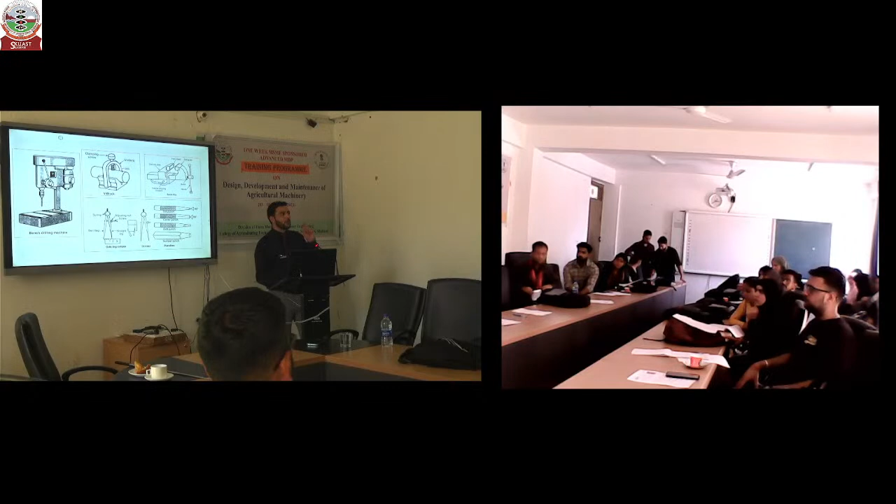One aspect only I would like to discuss in 10 minutes because there are the horticulture people, so I will discuss basics of spraying technology. Basics of spraying technology, up to this, can anybody summarize?

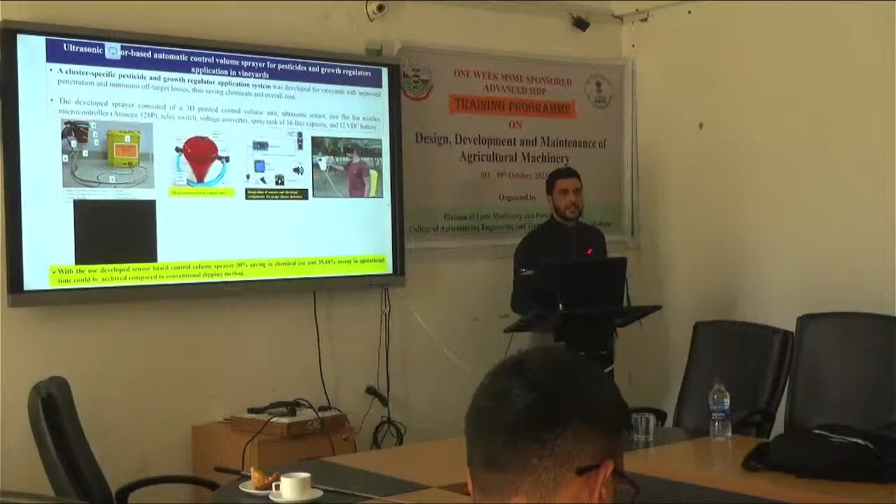I showed you advanced manufacturing. He simply measured the size of these bunches.

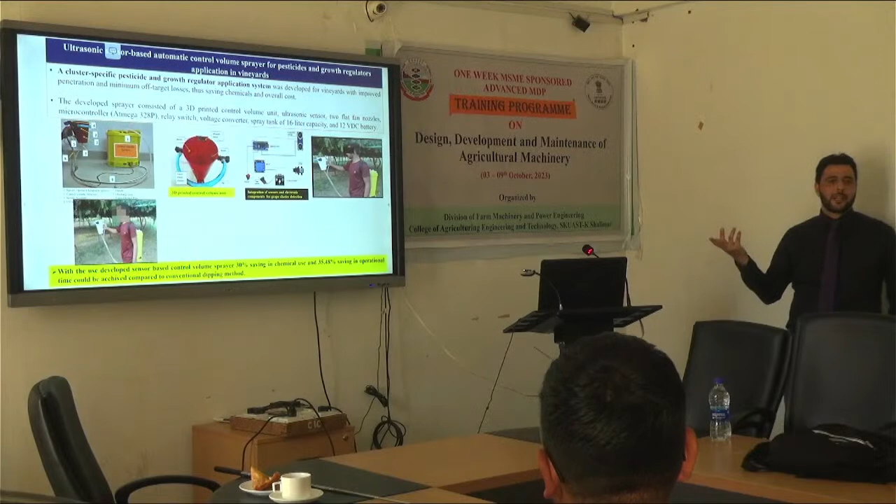If it were made of iron, what would have happened? He cannot carry it, there will be an ergonomics issue. So he selected that PLA material which I discussed, a lightweight material, giving 30% saving in chemicals.

So that is for small and marginal farmers. That is how you have to apply the knowledge in your domain. That is the basics of it.

I don't know, somebody is in vegetables here. Who is in vegetables? So in vegetable crops, can we have target spraying?

Target spraying means there is disease here, I detect the disease and spray only there. Because vegetables we consume directly, so if we go for blanket application of pesticides, what will happen? It will affect our health.

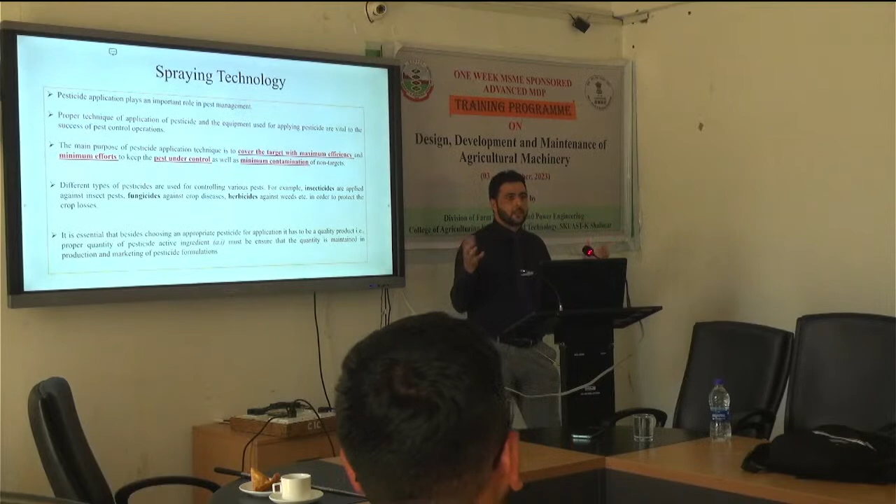That's the first component. So can we spray only in those areas where there is disease? We have to detect the disease, then spray. The remaining spraying technology stays the same. You have to atomize the spray because you need a particular droplet density.

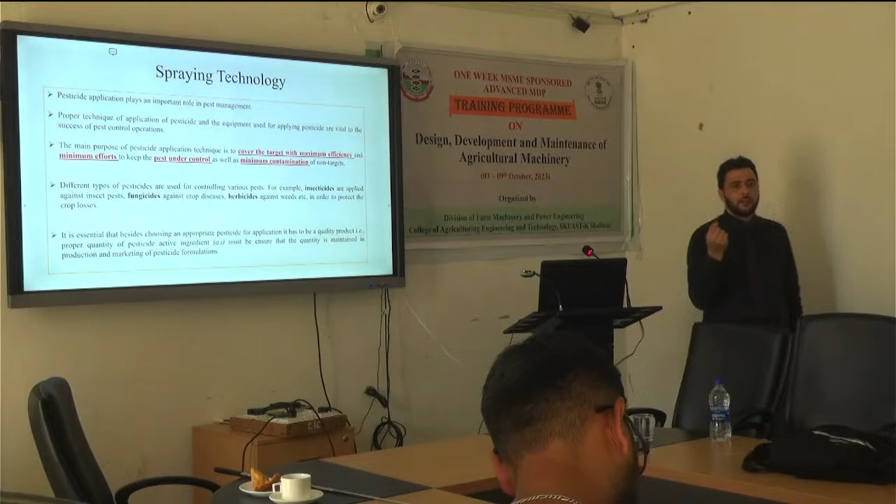Let us suppose there is a flying insect and you want to control it, flying in the air. If I have a coarse droplet, the size is big and it settles down below, it will not work. Since insects are flying, I want to control flying insects, so I should have a droplet size that stays in the air for a long time. That is why I decide I should have a fine droplet size.

Same way, what does fungus do? It spreads everywhere, in the whole area. When there is fungus, I have to cover the whole area, I cannot just go for spot treatment. Compared to that, if there is any other disease, we can have in-between coverage, so that if the disease is progressing, anywhere it will connect to the pesticide.

So these are the basics you have to understand about spraying technology. That is what I told you. For fungus, you need to cover the whole area, so accordingly you will select the nozzle. If you don't need to cover the whole area, you will select a straight stream.

Same way with pressure, you have to generate the pressure. So you will study which pressure gives which droplet size. That is the very basics.

But the important thing is what you have to do. How many days are left for the training? Two more days. So by tomorrow evening, you give one idea to the training coordinator.

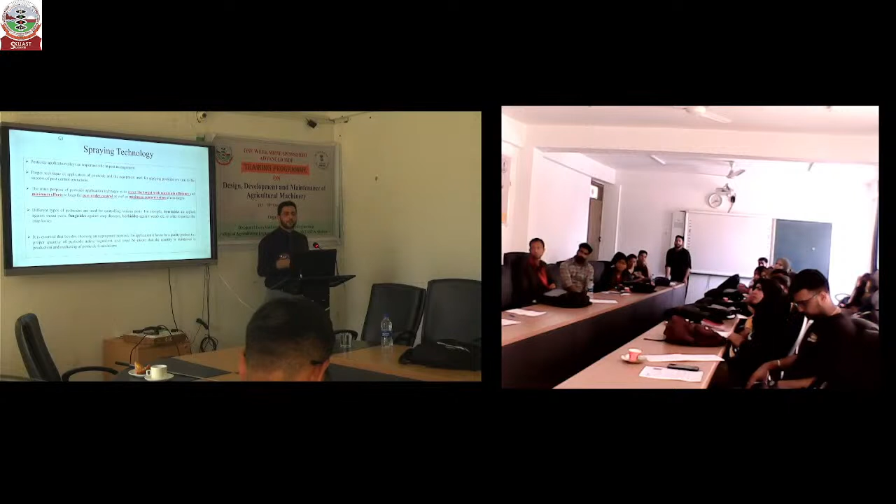Say that I want to solve this problem which I have learned in this training, I will try to solve this problem, this is my idea. This is how you progress. Tomorrow this could turn into something through entrepreneurship, you apply and a project comes out of it. That is how you put your idea into reality.

This is what I try to conclude in the time available. So this is all I had to convey. If you have any query or confusion, you can ask now.